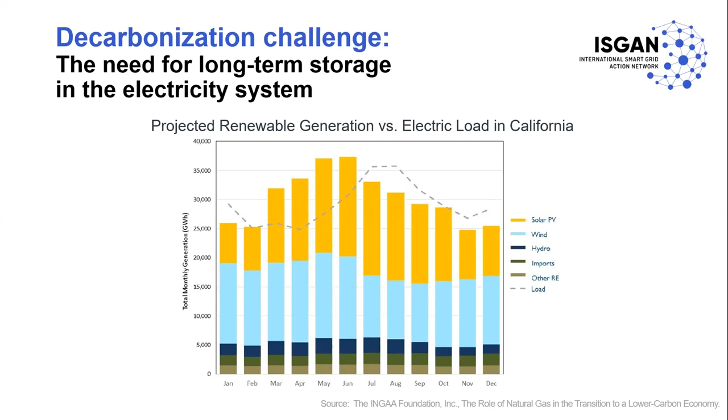The second major decarbonization challenge is the need for carbon neutral fuels for processes that cannot be electrified. And here what I mean is what I was mentioning before, that we can electrify a lot of different sectors. For example, short distance, light road transportation.

For example, I live in Colorado, and it's probably one of the states in the United States that has the most electric vehicles. Here, I will say that at least a third of the people I know personally don't drive a combustion engine vehicle anymore. They all drive an electric car. So we're already seeing how transportation can be partially electrified. Heating can be electrified, mostly using heat pumps, and some industrial processes can be electrified as well.

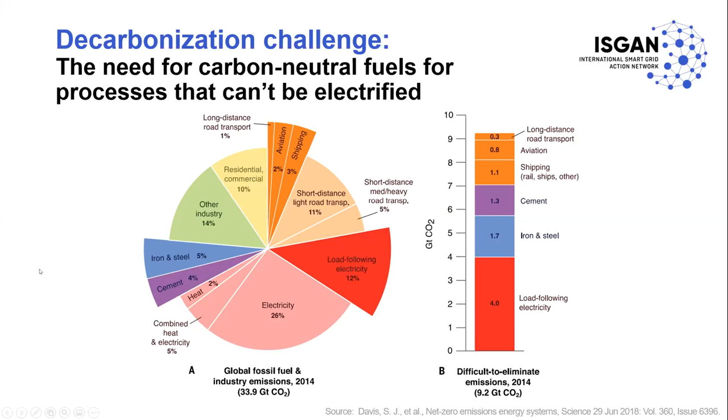We must find a carbon neutral fuel source. And what I believe is the major potential solution is integrating and coordinating coupled energy systems, primarily the power network and the gas network. As we all know, these two systems are already interconnected, even if they are not planned and operated in a very coordinated or common way, but they are highly connected. For example, in the United States, the electricity system highly depends on the gas network because the major source of electricity generation is gas-fired power plants that are all connected to a gas pipeline network.

So what we see from this picture is that gas turbines that burn gas, or demands in the gas network, are major injection points or major generation in the electricity network. However, there are two other types of links between the two systems. One is power to pressure. What I mean by that is there are several gas compressor stations, and those numbers are potentially increasing, that are electric driven, meaning that now the gas system also depends on the electricity system.

And then there is the power to gas connection, which is still at a very early stage, mostly developed in Europe at this point, but still mostly at demonstration pilots throughout different countries in Europe. And this is the major point of discussion of this presentation, power to gas. Power to gas is the ability to generate gas by consuming electricity. And I'll discuss later how that is done.

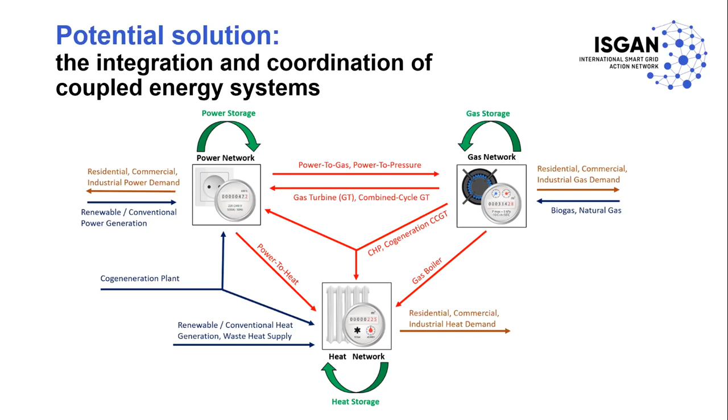So I want to now move back to power to gas. As I mentioned, power to gas is, I believe, one of the major solutions to decarbonize the economy by using electricity, ideally excess or curtailable renewably generated electricity, for example, from solar and wind plants, with the use of water to generate renewable hydrogen gas using power electrolyzers that take advantage of electrolysis, which can split water into hydrogen and oxygen. Hydrogen is a renewable gas that can be used for many different purposes. And I'll discuss a little bit more about that.

One thing you can do is store it in pipeline systems for later use. In a natural gas pipeline system, you'll be limited by how much you can inject. And there is a lot of discussion now in Europe about what that limit should be. People are discussing from a couple of percentage points in volumetric terms up to even 20% in volumetric terms. But I'll discuss a little bit more about that later. Of course, we are all aware of some of the challenges of hydrogen.

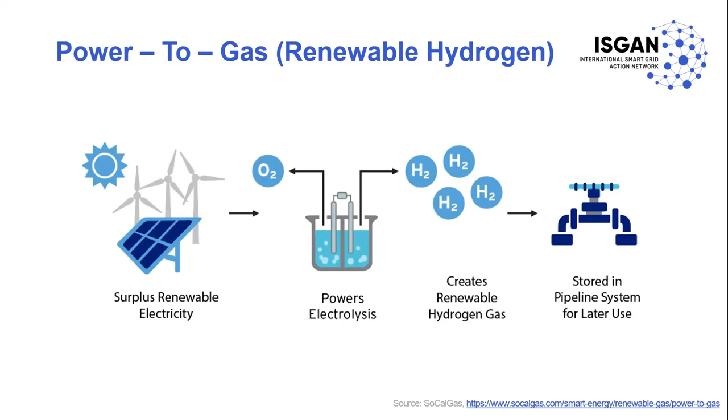And what is interesting is now we could also use this hydrogen in another kind of power to gas technology, which is, instead of using the hydrogen for the end use, we can use the hydrogen with captured CO2 from the air or from different industrial processes. We have plenty of them nowadays that generate carbon dioxide emissions. Use a bioreactor or some other type of methanation reactor to generate methane, which is, in other words, the same molecule as natural gas, CH4. So in a way, you are creating a renewable gas that is very similar to the natural gas that we are extracting today and using in so many different applications: electricity generation, heating, cooking, industrial processes, transportation, and so on.

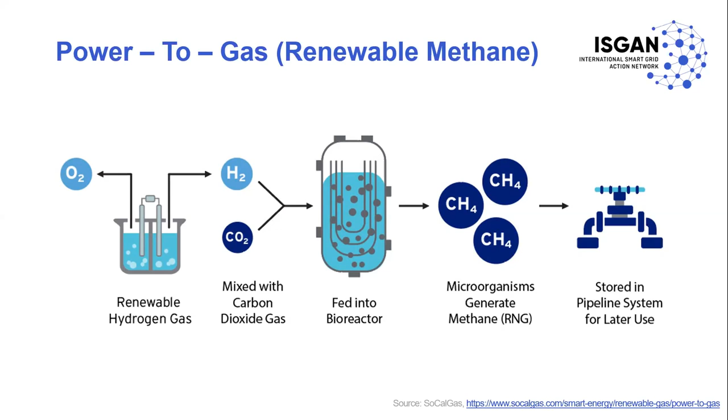So power to gas is giving the opportunity to link the electricity network with the gas network, be that the natural gas network or even a pure hydrogen network that we may envision for the future. So we can take advantage of the imbalance between electricity generation from wind and solar and electricity demand. And we can use the unused or curtailed electricity generation from wind and solar to generate hydrogen with an electrolyzer. And then that hydrogen, we can either use it as it is, or, as I mentioned before, convert it to renewable methane. Either way, we can use the hydrogen in a natural gas pipeline network by simply injecting it and blending it with the natural gas and other types of biogases that we may want to inject in the gas grid.

We may use methanation to convert it directly into methane, or we can imagine a hydrogen network or a hydrogen system that delivers hydrogen, for example, for storage. So now you could use all the hydrogen you're generating and store it in very large quantities, and that could represent a way of storing energy for the long term for the power system, and then use that hydrogen, for example, in fuel cells to generate electricity again.

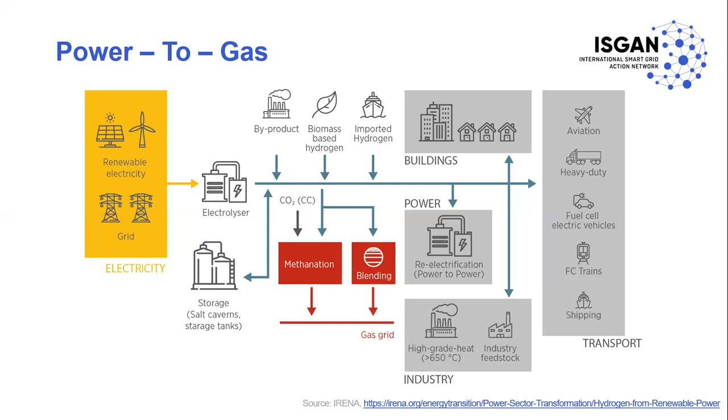Okay, I'll continue. So I gave a very detailed background about the need to couple different energy networks. And now I switch more to modeling, which is why do we need to model them? So historically, energy systems, for example, electricity networks or natural gas pipeline networks, have been planned and operated independently. And therefore, different software tools have been used to model different energy systems.

The physics of the two systems are different, and they've been planned and operated by different people, different institutions. And therefore, the software that has been used to model them to inform planning and operational decisions has been different. So it is very hard to model the interface between coupled energy systems when you're using different tools to model each of them. And generally, it is also a very time-consuming and error-prone process.

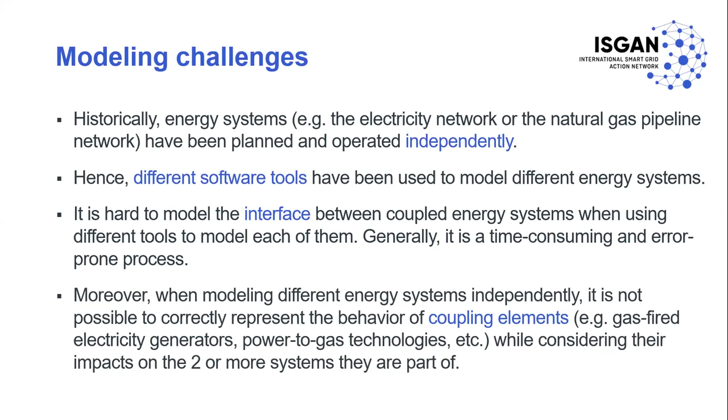Moreover, when modeling different energy systems independently, it is not possible to correctly represent the behavior of coupling elements like gas-fired electricity generators, power-to-gas technologies, and, for example, electric-driven compressor stations, while considering their impact on the two or more systems they are part of. What I mean is, when you have an element that belongs to two systems, if you are only modeling one of the systems, you cannot really correctly model how the system behaves and how it impacts and is impacted by what is going on in the two or three systems it is connected to, in case it is also connected to the heat network.

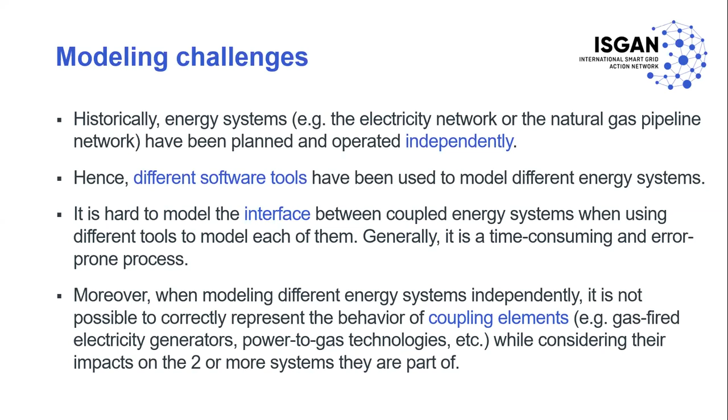So here is where we talk about what we believe is a solution for this modeling challenge. How do we model two systems that are coupled? Because the coupling is becoming so important, how do we model them when we have different tools? Well, our solution is the Scenario Analysis Interface for Energy Systems, or SAInt, which is a software application that can model, plan, and operate coupled electricity, gas, and heat networks.

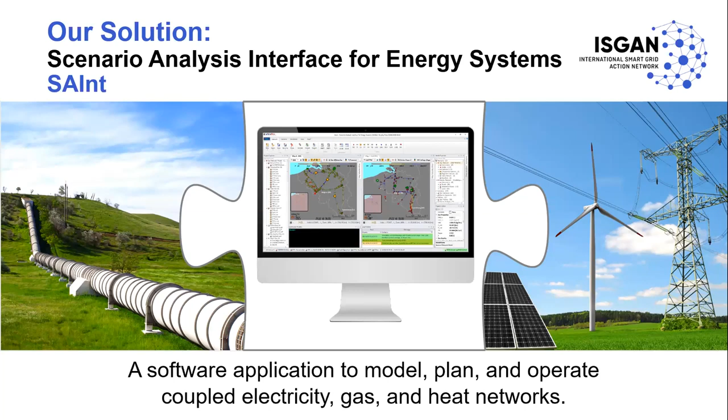SAInt is the only commercial software that today can model coupled energy systems using different modeling approaches that include simulation and optimization algorithms, all in a single environment and graphical user interface. What do I mean by that? In the same software, in the same platform, a user can model an electricity network, a gas network, and we are now developing the capability to model a heat network as well.

And you can model any of these networks either independently, but still using the same framework and the same software, or you can model them in a coupled way, meaning that instead of solving a set of equations that describe one system and then iterating with solving the equations that represent another system, you are solving them together with the equations that represent the coupling elements, for example, a gas-fired power plant or a power-to-gas technology.

Moreover, I imagine many of the people attending this webinar are energy system modelers. And as you all know, modeling a system is trying to represent with a mathematical formulation a certain behavior of a system. And you can model a system for many different reasons.

You can model it for planning reasons. You may want to find the optimal investment, for example, in generation and transmission in a power system, or you may want to run it to optimize operations, for example, in an electricity system to commit and dispatch electricity generators. Or you may also just want to run a simulation to understand the steady state or dynamic physical behavior of the system, for example, to study the reliability and the resiliency of the system under different scenarios or under different operational conditions.

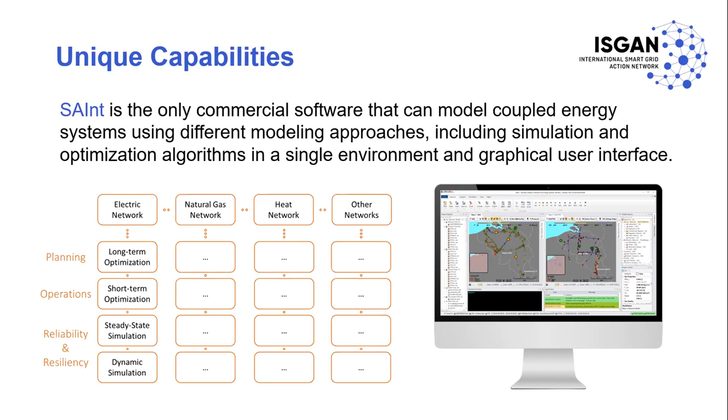Now, we are a relatively young company, so we haven't developed all of these yet. Currently, in our commercial version, we have 2 natural gas network modeling approaches or modules, which are steady state and dynamic simulation of natural gas networks. And on the electric network, we have steady state simulation, so AC power flow. And we also have 2 short-term optimization modules, an AC optimal power flow module, and we are currently finalizing the development of a full detailed unit commitment economic dispatch short-term optimization module.

So currently, SAInt is used by our clients and our partners to model real large-scale electricity and gas networks. And here I want to mention a couple of characteristics that SAInt has that I believe are very relevant and valuable. We're trying to model electricity and gas networks in a coupled way. So SAInt can model the injection and blending of different gases, meaning now you can model how a power-to-gas facility that is a demand in the electric network injects a different gas quality in the gas network. And you can track that gas composition throughout the system. And we will see a little bit more of that later.

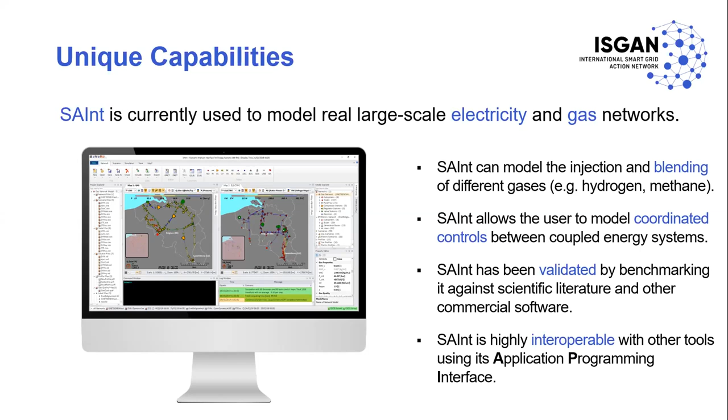SAInt also allows the user to model coordinated controls between coupled energy systems, meaning now you can apply a control on the electric system that is a function of a variable or of a condition in the gas network and vice versa. I want to mention that SAInt has also been validated by benchmarking it against scientific literature and other commercial software, and that SAInt is highly interoperable with other tools thanks to its application programming interface, its API. So you can actually connect SAInt with other software that may be modeling other networks that SAInt doesn't currently model beyond electricity and gas networks at the moment.

So why would someone want to use SAInt? Well, you may want to use SAInt to save capital and operational costs of both electricity and gas networks. You may want to use SAInt to take better investment decisions, considering the coupling of electricity and gas networks, looking in future scenarios at assets both in the electricity and gas networks. You may also want to use SAInt to reduce the cost of operating both systems. And, related to that, to understand really how the 2 systems, electricity and gas network, work together, and how you can increase as an operator the efficiency of operating both systems.

You may also use it to improve system reliability and security of energy supply in electricity and gas networks, for instance, by looking at how a contingency in one system not only affects that system, but how it affects the other system it's connected to. For example, how does an outage in the electric system potentially affect compressor stations in the gas network, and how is the gas network affected. And finally, you can use it to find ways to reduce greenhouse gas emissions overall, for instance, by using curtailable electricity to generate renewable hydrogen and inject it in the gas network. Users of SAInt include transmission and distribution network operators of both electricity and gas systems, governments and energy regulators, and also definitely research institutions and universities.

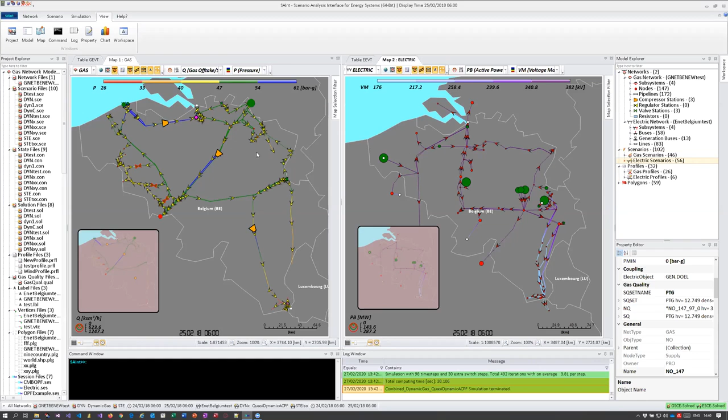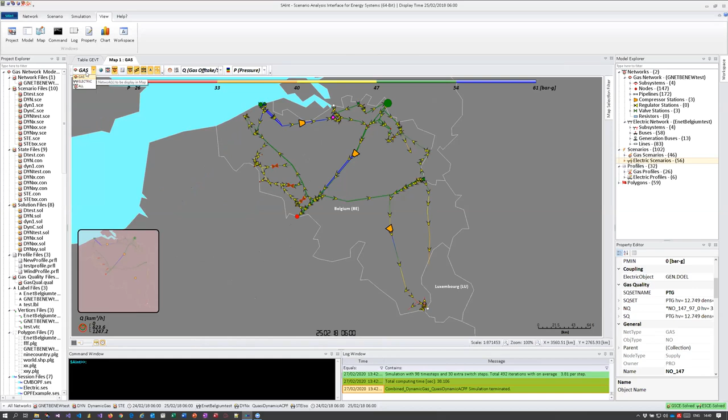In order to show you how these two networks are coupled, I'm going to visualize the two networks in one map. So I'm going to close the right map, and visualize both networks in one map. And if I do so, you will see here the gas and electricity network both in this map. I'm going to zoom in into some of the coupling areas to explain what links were defined for this example.

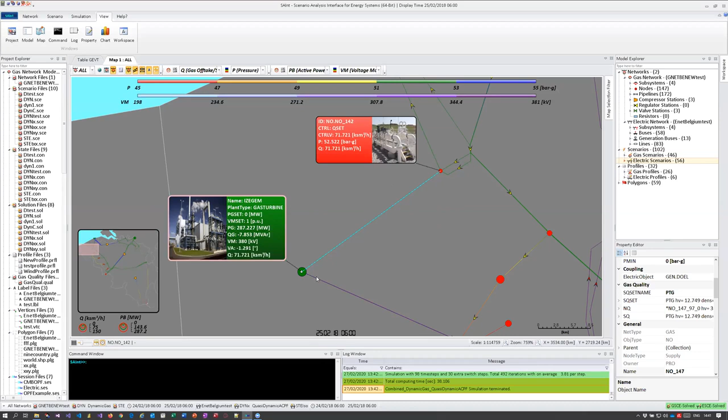The cyan dash-dotted lines represent the coupling points between the electricity and the gas network. So here is a coupling between a gas turbine and a gas station, which means the gas turbine that is connected to the electricity grid extracts gas from the gas pipeline in order to burn the gas, produce electricity and inject it into the electric grid.

Another coupling that can be defined is the coupling at electric-driven gas compressor stations, which is shown here. So here is a gas compressor station. A gas compressor station is needed to increase the pressure of the gas for further transportation. But of course, to increase the pressure of the gas, we need some energy or power, and this power can either be from a gas turbine at the gas compressor station, or from an electric motor.

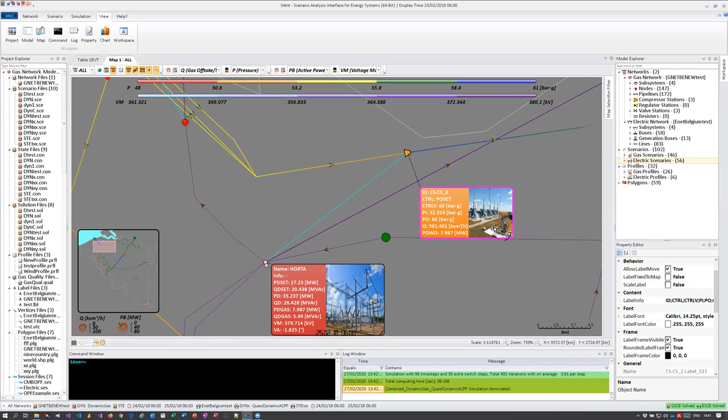And this electric motor will need electric power from the electric grid in order to drive the compressor. So in this example, we defined an extraction of electricity from this bus in order to power the electric engines in the gas compressor station that is located here. So this is this connection.

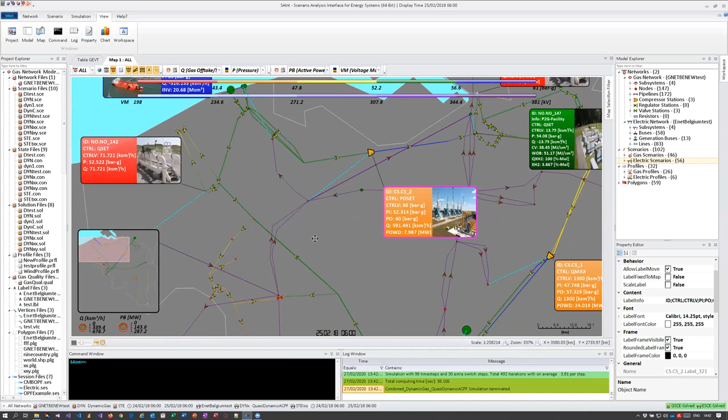And last, the coupling that I want to focus on in the remainder of my demonstration is the coupling at a power-to-gas facility. So in this example, this is the gas network. We have here a power-to-gas facility, which should extract electricity from the electric grid in order to produce hydrogen in the electrolyzer and inject the hydrogen into the gas grid. So this hydrogen injection needs to be modeled at this point.

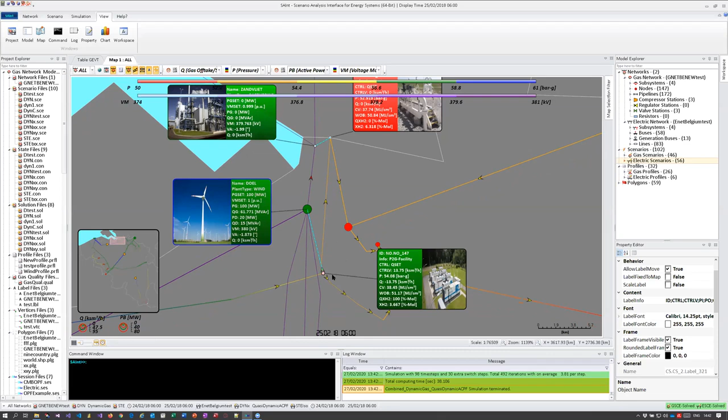And the way we model the hydrogen injection is, I'm going to show you very quickly a window where it is shown. So basically we define a gas quality for this node.

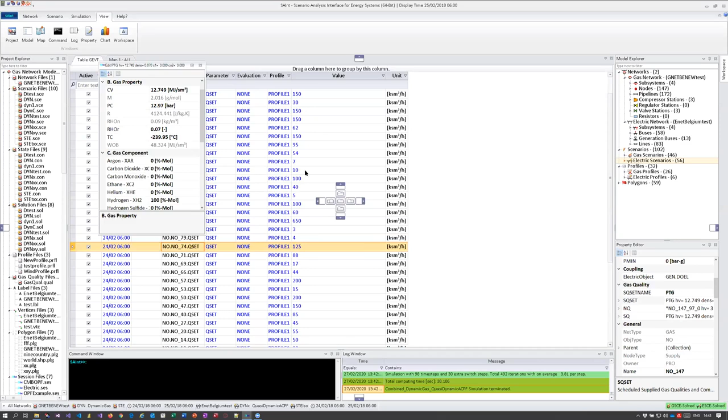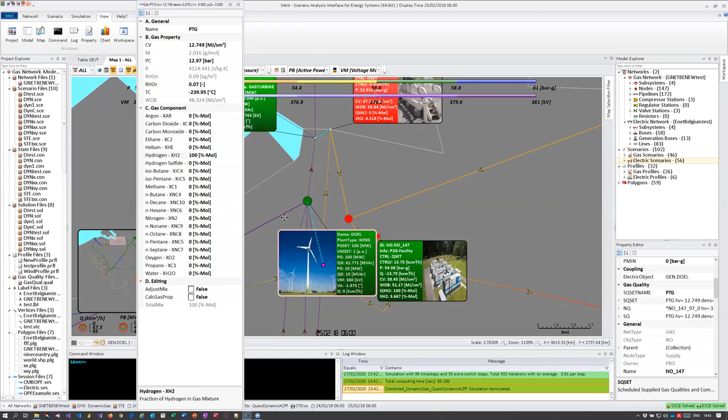And within this gas quality definition, we can basically define what is the mole fraction that we want to inject at this node. And as you can see here in this property editor, we can define different typical chemical components of natural gas, which includes also here the hydrogen as one of the components. And in this case, we defined 100% hydrogen. So we are gonna inject 100% hydrogen at the node where this power to gas facility is located.

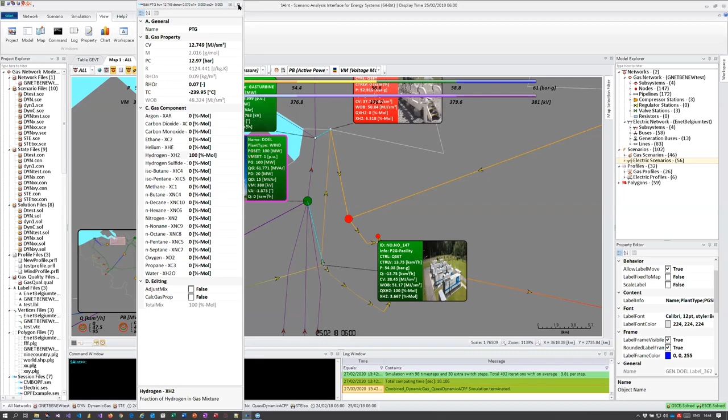But obviously we could also define a different mole fraction that we inject here. For instance, if we had a methanation process at this power to gas facility, we could also define the mole fractions accordingly by, for instance, adding some fraction of methane to this fraction distribution. So now, we have defined the hydrogen fraction at this node. So the hydrogen is going to be injected at this node.

But as you probably will see, when we inject hydrogen at this node, we will have a blending between the normal high calorific natural gas that is coming from the upstream pipeline with the hydrogen that we inject at this node. And as you know, hydrogen has a lower calorific value per standard cubic meter than high calorific natural gas. So we are going to change the calorific value of the gas that goes downstream.

Then downstream this point here, we have also other customers that are connected to the gas grid. For instance, there is a customer here, which is again a gas turbine that will extract gas from this gas station in order to produce electricity. So you can imagine if we inject here hydrogen, this hydrogen will move with the velocity of the gas stream, which is probably around 8 meters per second, 10 meters per second. And as the gas stream moves, it will change the quality also at this node, meaning the calorific value of the gas at this node is going to change if we inject more hydrogen.

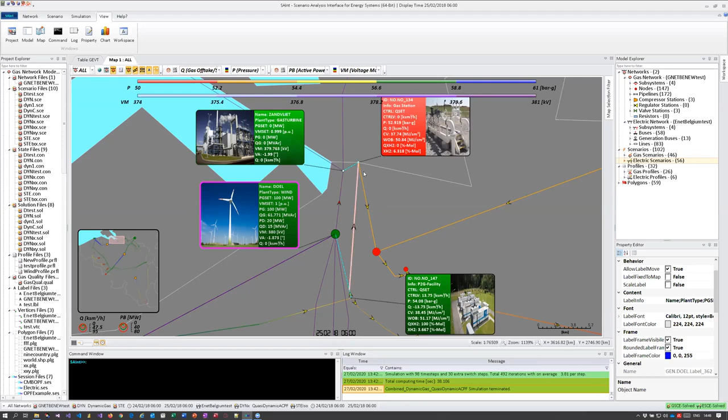But if the calorific value changes here, it will also mean that the amount of gas that we need to produce a specific amount of power in the electric grid will be higher compared to the case where we did not inject hydrogen and had only high calorific natural gas passing through the pipeline. So you see here we have a bidirectional coupling between the two networks. And if you want to model this kind of problem in the traditional tools where the systems are modeled separately, you would have to do an iterative process, but you will fail because you cannot reflect the actual bidirectional coupling. So that's where we step in as encoord, and also using SAInt.

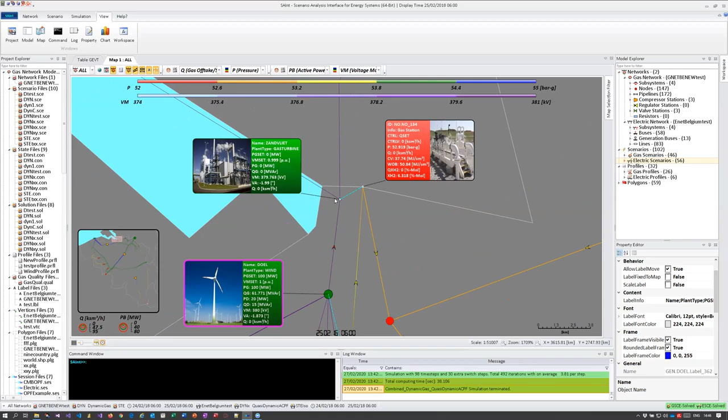We model these interconnections between the gas and electricity network in one simulation time frame, so in one matrix, where we reflect the physical equations for the gas network, the physical equations for the electricity network, and we define the coupling equations that describe the interlink between the two networks. We describe all of them in one matrix, and we solve the entire problem for each time step so that we can directly reflect the interdependency between these two networks in each simulation time step.

Okay, so I'm going to run the simulation very quickly. This is basically a 24-hour simulation with a time step of 15 minutes. We are running a transient simulation on the gas side and a multi-time step AC power flow on the electricity side. I'm just gonna execute the simulation. I go on simulation and I click on combined simulation. So now it is running this simulation in a coupled way.

And as you can see, we get also some log output which tells us what is currently happening in the simulation. The simulation also considers the constraints in the systems because, for instance, you may have a pressure limit at some of the nodes within your gas network. And there will be some times where maybe you go below the pressure, then the system will adapt the controls of different facilities in the gas network so that in every time step, you have a solution that is within the operating region.

So the simulation has finished. And now we're going to have a look at some of the results, and we will focus mainly on this part with the power to gas facility. To open some of the results, I need to move this icon. So I go on view and I click on chart, and now we can have a look at some of the results.

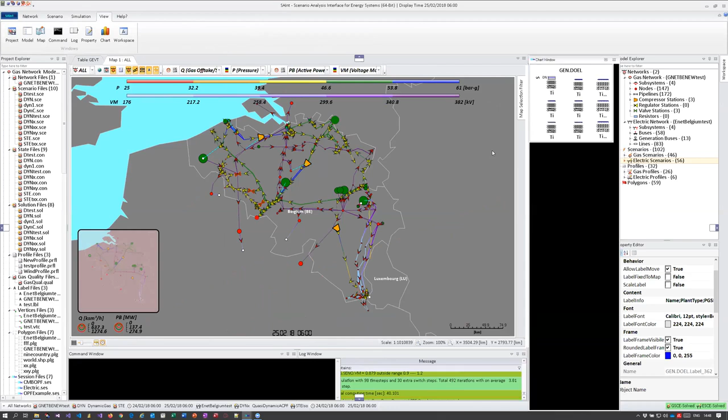Just put this in and zoom in. So let's have a look at the results for the power to gas facility. If I click on the power to gas facility, then what do we see here? We see in this right chart window, there is a plot on the center right, which tells you here it's the Q, which is in 1,000 standard cubic meter per hour, and it's basically the injection of hydrogen over time at this node.

So as you can see, there are times where we inject hydrogen into the network, and there are times where we do not. And these are basically the times where we have excess generation from the electric grid, okay? So when we inject hydrogen to the network, obviously this is gonna change the mole fraction of the blended gas at this node. And this is shown in the left center plot, where you see the mole fraction of some selected gas components. XC1 is methane, XC2 is ethane, then CO2, then nitrogen, and then hydrogen is XH2.

And as you can see, as we inject hydrogen into the network at these times, where we have these peaks, you see that we have also some peaks for the hydrogen. So the green line has also these peaks. So as we inject hydrogen, we reduce the mole fraction of methane, right? And this in turn has an effect on the calorific value. As I mentioned before, the calorific value of hydrogen per standard cubic meter is lower than the calorific value of high calorific natural gas.

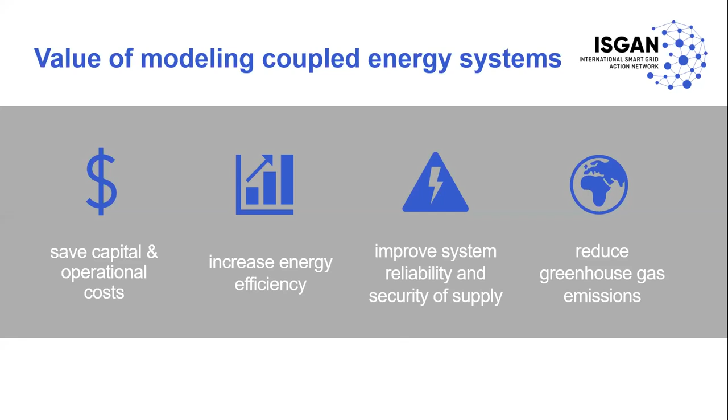I would like to end by showing you very quickly 3 case studies in which SAInt is used for modeling coupled electricity and natural gas networks, and how there are different types of institutions that are interested in the ability to model coupled gas and electricity networks for different reasons.

The first one is the European Commission's Joint Research Center, which is using SAInt to model coupled European electricity and natural gas networks to run analysis of security of supply in integrated gas and electricity networks. And they are running feasibility and contingency analysis, as well as developing and testing mitigation strategies. As an example, one type of contingency analysis that one could do is if there is a contingency in one of the gas supplies.

Let's imagine a situation where one of the countries delivering gas to one of the European Union countries has an issue and cannot continue the delivery of gas. How does that affect the gas network overall in Europe, and how does that then affect the electricity network?

And vice versa, one could imagine a situation where an outage in the electricity network may affect the gas network. By running this coupled simulation, you can understand the interdependencies between the two systems and the impact of an outage in one system on the other one.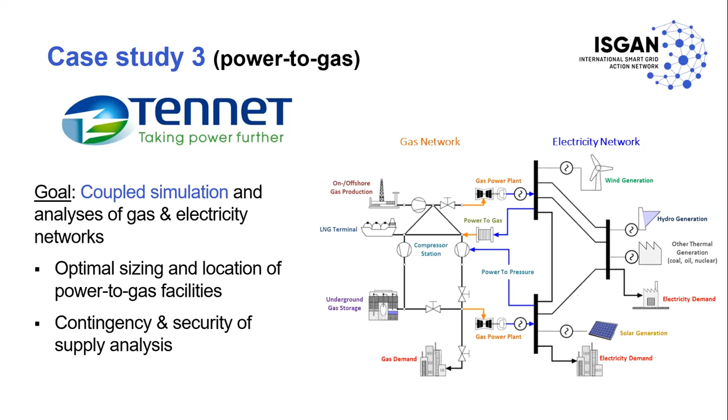And this coupled modeling capability gives them the opportunity to include how their electricity transmission network is coupled in the future with a gas network or even potentially a new hydrogen network.

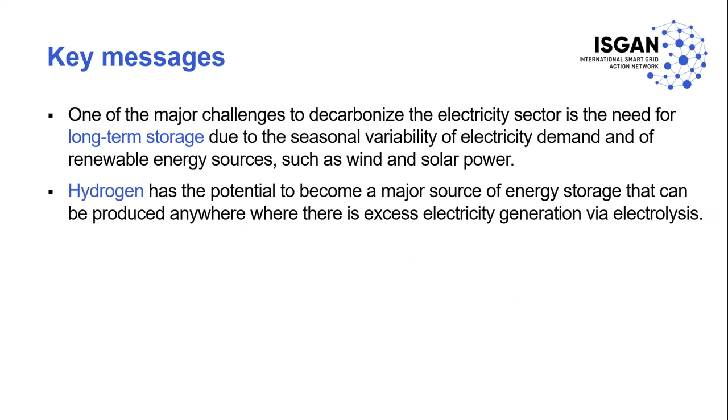So the major key messages I would like to share at the end of this presentation are that one of the major challenges to decarbonize the electric sector is the need for long-term storage due to the seasonal variability of renewables and of electricity demand. Hydrogen has the potential to become a major source of energy storage that can be produced anywhere where there is excess electricity generation from renewables via electrolysis,

and the integration and coordination of coupled energy networks such as electricity, gas, and heat networks represent major opportunities to decarbonize a large share of the sectors responsible for today's anthropogenic greenhouse gas emissions, including electricity and heat production, but also buildings, transportation, and different industrial processes. And finally, the best way to study and understand the coupling and the synergies of different energy networks is to model them in a coupled way.

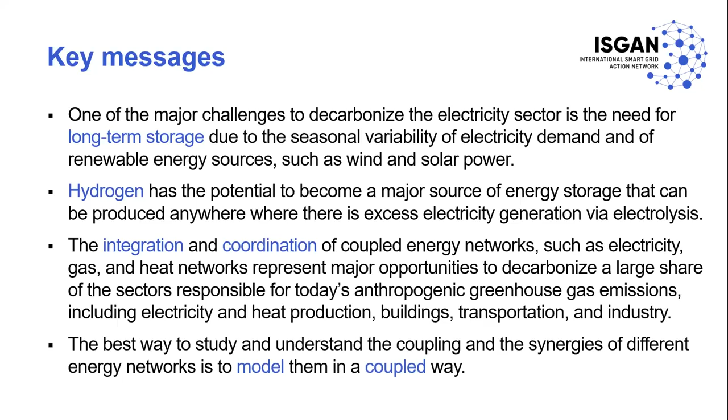And I'd like to end by saying that we believe that the integration of energy systems and the coordination of their planning and operational processes are needed to achieve the challenging economy-wide decarbonization goals.